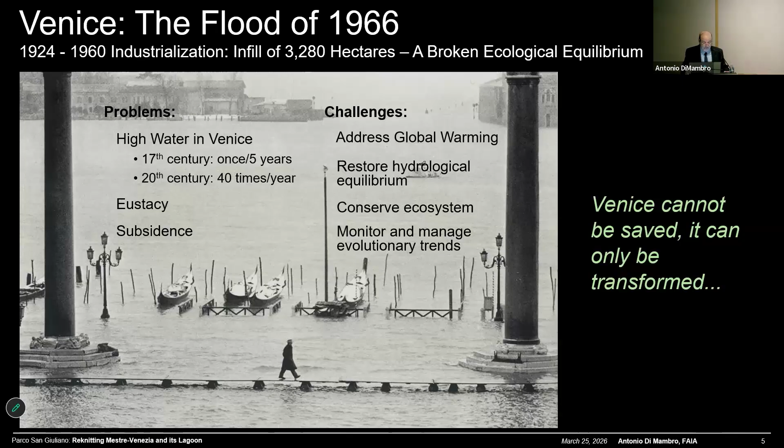They wanted to immediately save Venice. Venice cannot be saved, it can only be transformed. And the problems that unfolded at that time required a special set of laws that the Italian government decided to promulgate.

These laws led in 1984 to the creation of a new consortium, Venezia Nuova, which regulated the protection barrier that the city and other organizations decided to build in order to save the lagoon from the sea.

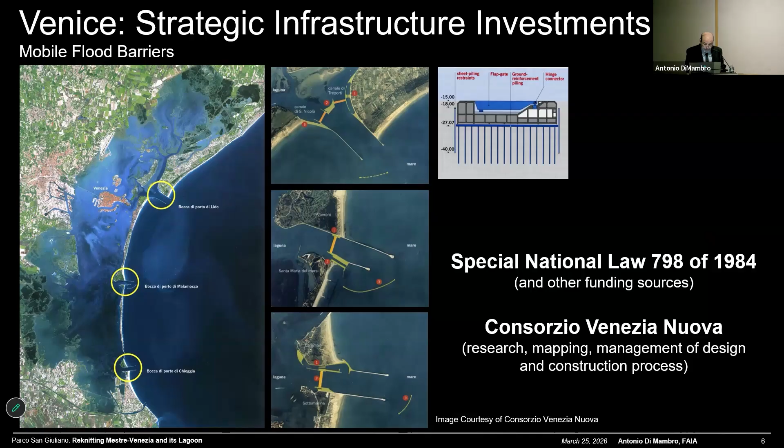Having given you the framework, I'd like to start my presentation of the project of the city with two heads, Mestre and Venice, a project conceived at the turn of the century between the 20th and 21st. I've organized this presentation in three parts, but it will be very dense. I wish I had three hours. I don't, so pardon my speed.

In the first part, I'll give you the understanding of the historical facts and conditions that led to the international competition. In the second part, I will illustrate the guiding planning documents and all the detailed project documentation we have prepared, and then give you a view of the completed part of the project.

And guide you through a tour of the park, which is an assemblage of images I have taken during my many visits. When I finish a project, I never abandon it. You, as a professional, need to be accountable to what you do and defend it if it's worth it.

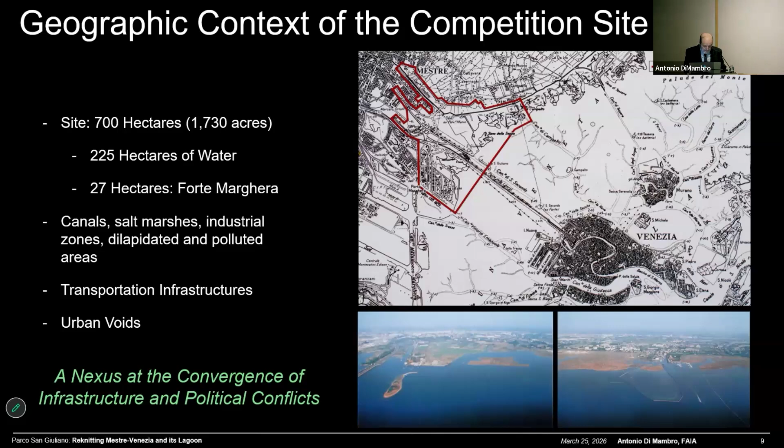The site was a very special one. It's where an umbilical cord was eventually, historically, attached to the island, and the island became connected with the main infrastructure that the country was building.

There were many improvements done in this area. You can see that in this area, there is a band of protective natural habitat called le barene in Italian. Canals were built to connect Mestre to the lagoon, before a grove of railroad and other infrastructure were used to cover this natural habitat.

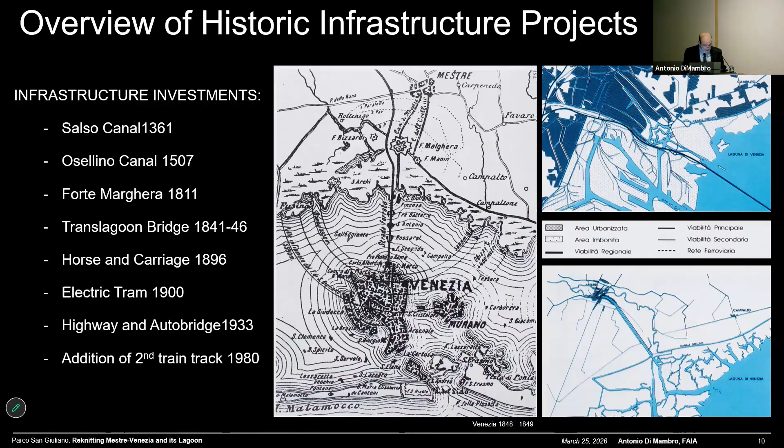The actions that changed the nature of that natural habitat are summarized in these three points. First, the incredible development of a very ill-conceived, I may add, a posteriori, industrial park, the most important industrial pole of northern Italy, right on the lagoon. That incredible futuristic park was conceived without considering the implication of what was being done to the environment.

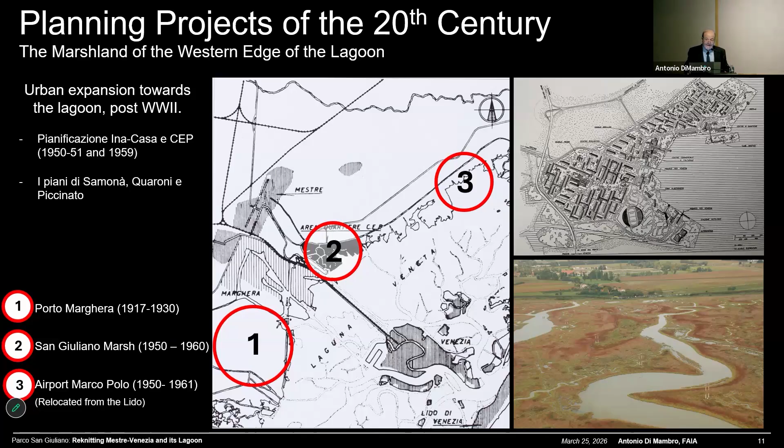But while this discussion was going on, the people that had proposed the greatest industrial pole of northern Italy were dumping toxic waste on the same place. And all of a sudden, we had an ecological disaster.

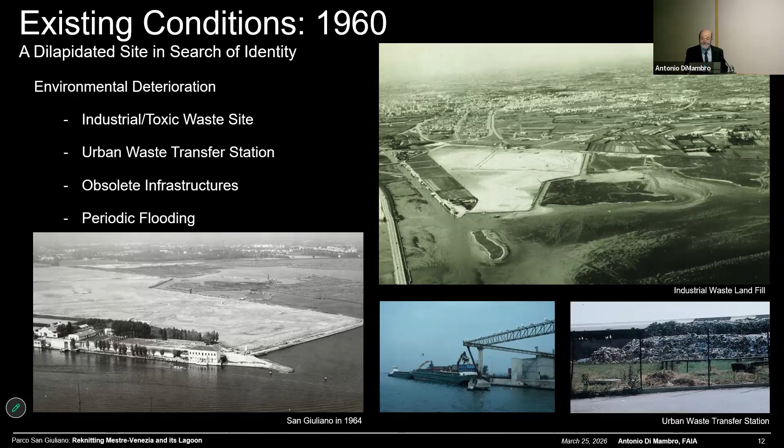The site was in search of identity, character, and function. It's a site that flooded big time, and toxic waste was deposited without protection on the Barene. To make things even worse, all the urban waste of Venice came to this point and was processed and shipped outside of the site. Meanwhile, the place that was so dear to the people of Mestre was this little park at the tip, which was their common ground.

Very quickly, let me show you the condition of all this area: dilapidated and in search of identity. There were heritage sites. There were incredible waterways and infrastructure that was in a state of decay. Constructions in the water had limited the flow of water, creating major problems.

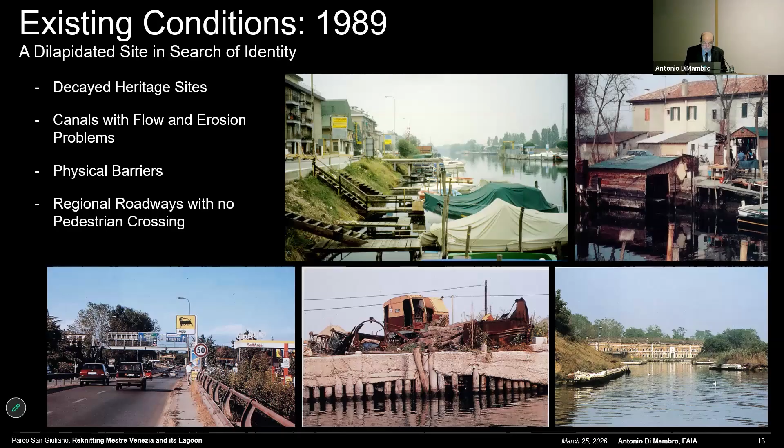So we entered the competition with a very clear choice that we had made. We saw three courses for the ecological evolution of the city, of the lagoon: the natural course, that with time would silt the entire lagoon; the conservation course of action, that controlled the lagoon environment; and the current course, where the sea would take over again.

The conservation course of action guided our work, and I believe it's the right choice here.

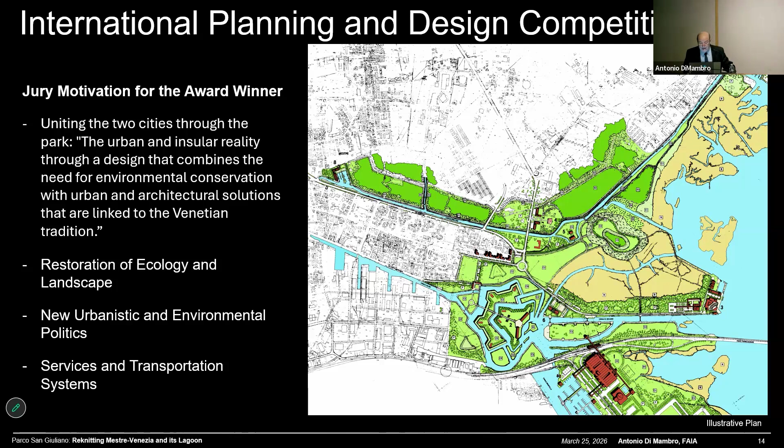We were awarded this, winning with a very simple motivation. They liked our proposal because it was based on the restoration of the ecology and the landscape. We had expressed very new ideas about environmental politics, and we believed that any restoration of the ecology there had to be done with services and transportation systems. The image speaks for itself.

After we won, the city were puzzled, as Margarita said, that an American team had won this. I began to have negotiations with the city leaders. They wanted me to do this project. I said, maybe.

I believe in interdisciplinarity and a holistic approach. I believe in participatory processes. And I have very strong views about the reclamation of the environment. We need to make sure that the city and its citizens understand this complexity. It was not an easy task, but they agreed with it, and we began our adventure.

The first thing that we produced was a series of diagrams that illustrate how the entire area would be reorganized, how the various parts, the kit of parts, would fit together in a new comprehensive view, and how the activities would be programmed inside each of these zones.

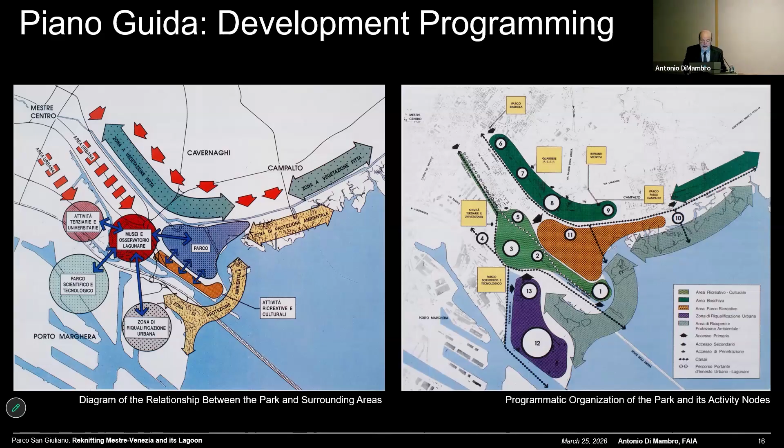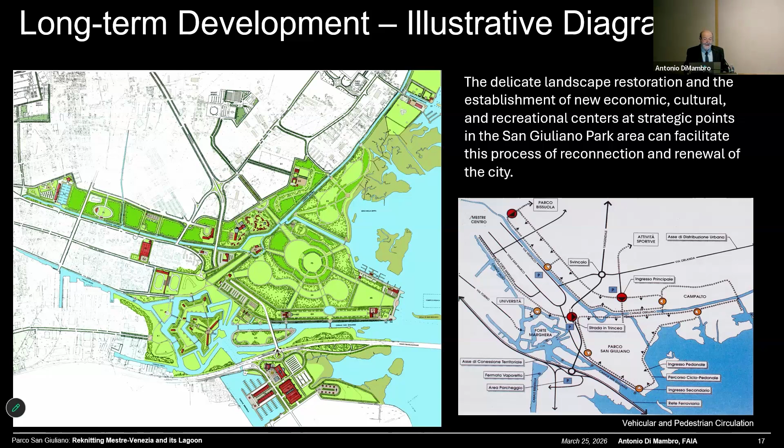The long-term development plan was refined because we had new information, and some of the things we were suggesting in the original proposal could not be achieved. We ended up with this plan, which is a delicate restoration of the landscape with the infusion of economic, cultural, and recreational centers at strategic points, based on a fine-tuned network of roadways, walkways, and canals.

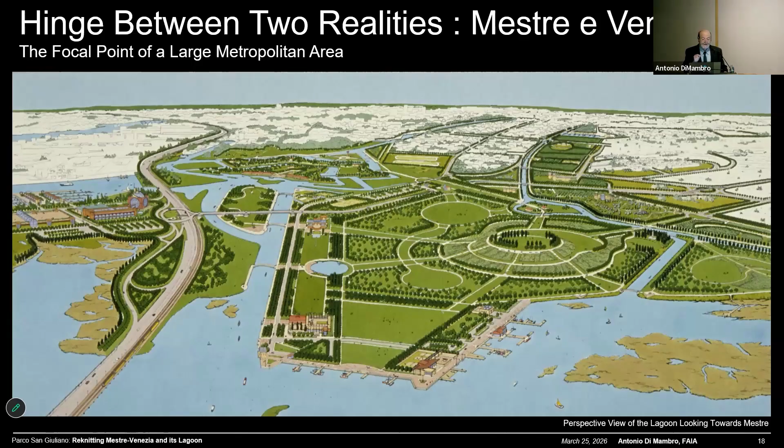The image we proposed was the hinge between the two realities of Mestre and Venice, a focal point of the large metropolitan area. The backbone of this was green infrastructure, supported by other infrastructure, made of very important pieces of the lagoon: woodland, recreational park, ecological gardens, urban green, natural habitat, and the stabilization of the entire water edge.

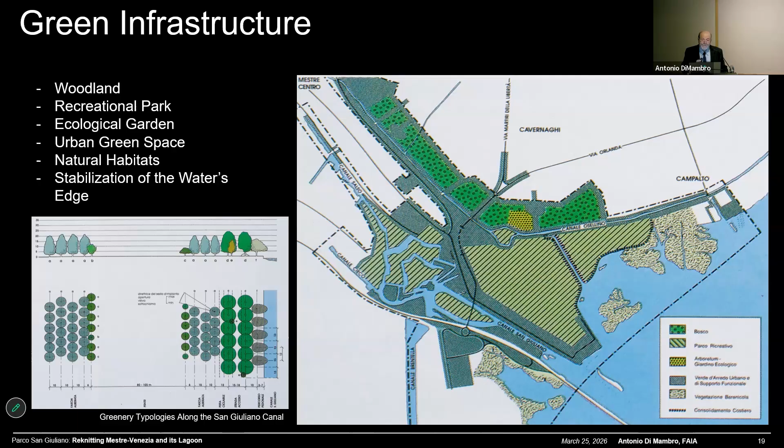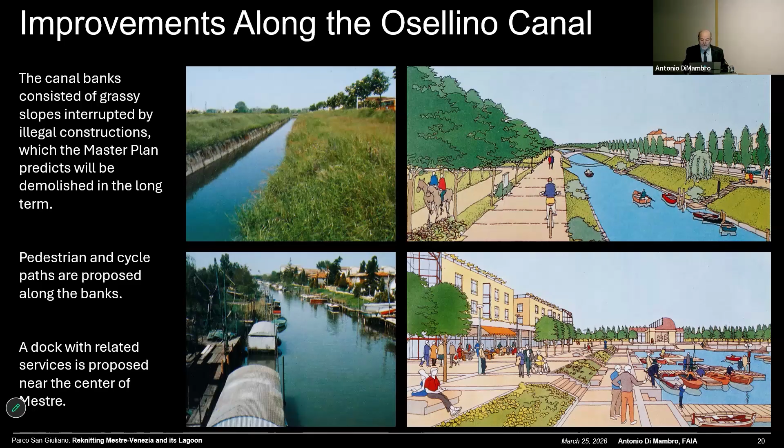The improvements we proposed for each of these areas were compelling. How many nights we spent discussing the look of these places, but you see the transformation. For example, along Canale Osellino, all these boats that were there prevented water from moving. We proposed to free that, and new edges were defined.

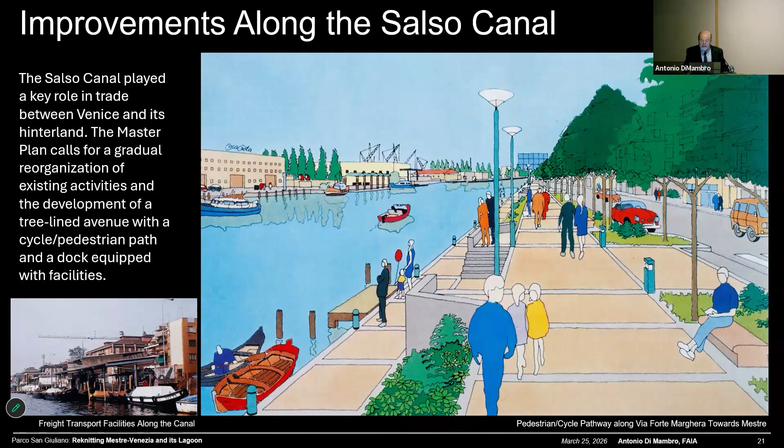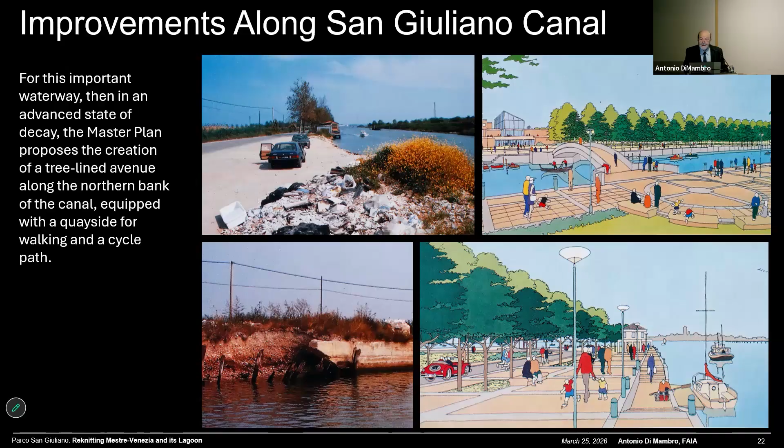Along Canale Salso, a two-side canal with economic activity on one side and pathways for strolling on the other. Along Canale San Giuliano, a dumping ground when I first arrived there, now a promenade, and that leads to a meeting place once again, which is Punta San Giuliano and its reorganization of all the activities.

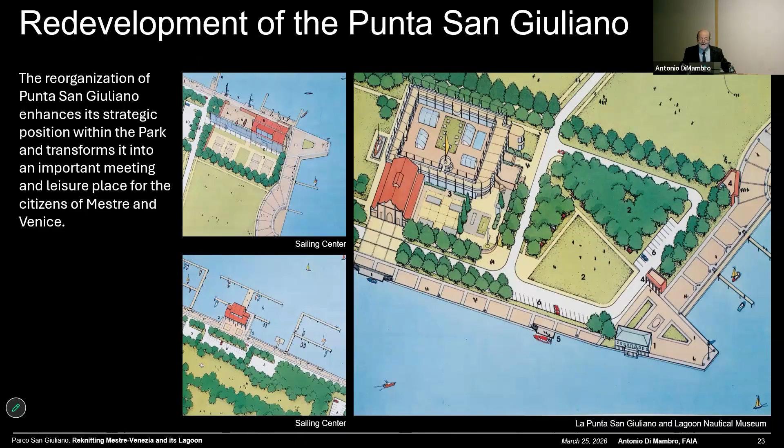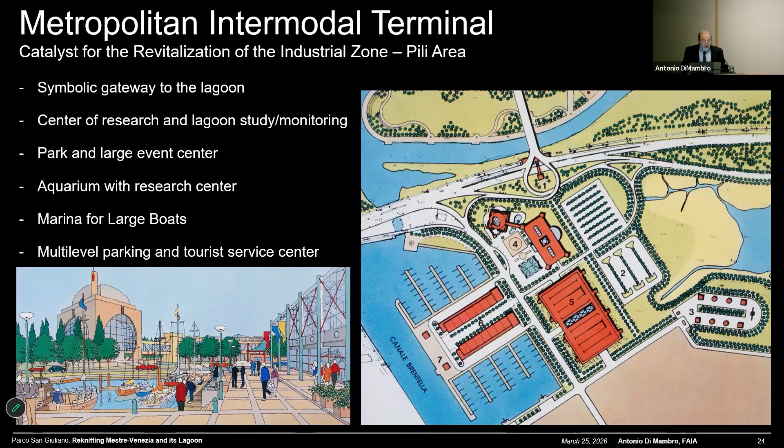And under this grove, a series of facilities for picnic, for community life, etc. But the most important thing we proposed was a metropolitan intermodal facility, a terminal that becomes the catalyst for the revitalization of the other nightmare on the other side. It becomes a symbolic gateway to the Lagoon, a research center, park, and other facilities for large gathering, multi-level parking and tourist services.

And the Lagoon Heritage Memorial, which we planned inside the fortress and the exhibition areas. We finished our work and produced 36 panels, which I shipped, and the city decided to have an exhibition.

I couldn't attend that day. The fate and my body was beginning to tell me that I was traveling too much. But I sent a few messages in the form of short essays that were printed by the three major papers.

And I said to them, to redesign the city, it is possible. We have accepted your challenge. Now you need to win the battle. In the image on the left, you see Mayor Cacciari, Pro-Mayor Zorzetto, and other leaders. They were there in front of all the documentation, and they had to answer questions from the journalists.

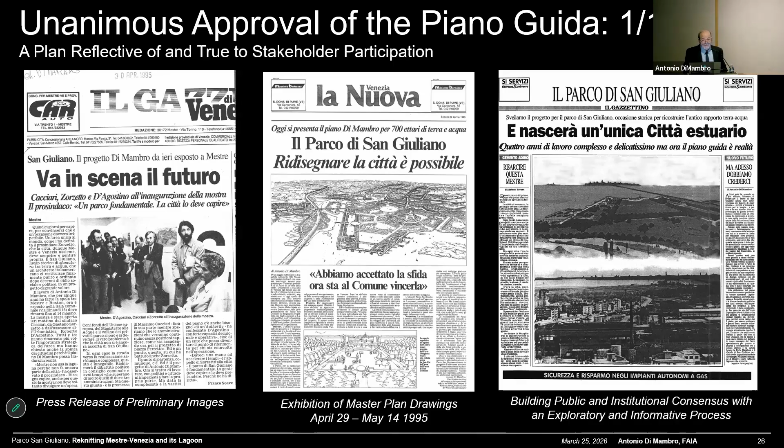The agreement we negotiated was very complicated, but it was extremely important. The park as a key link connecting Venice and Mestre—it had to be bottom-up, not top-down. Our challenge was to demonstrate the establishment of the natural habitat as a priority and a possibility, and providing ideas for site remediation was very, very complex.

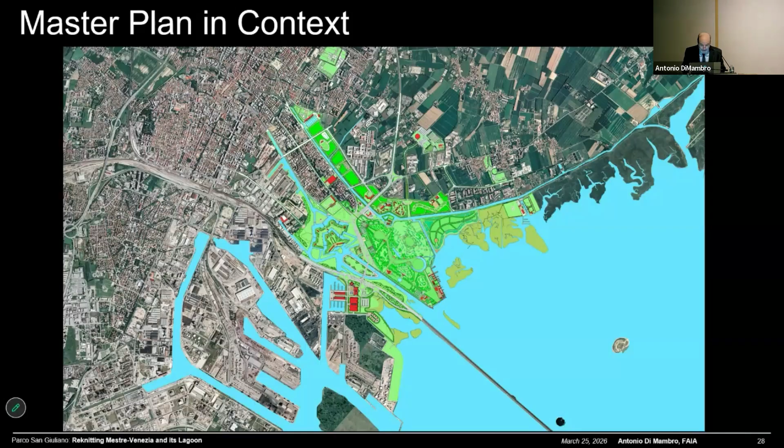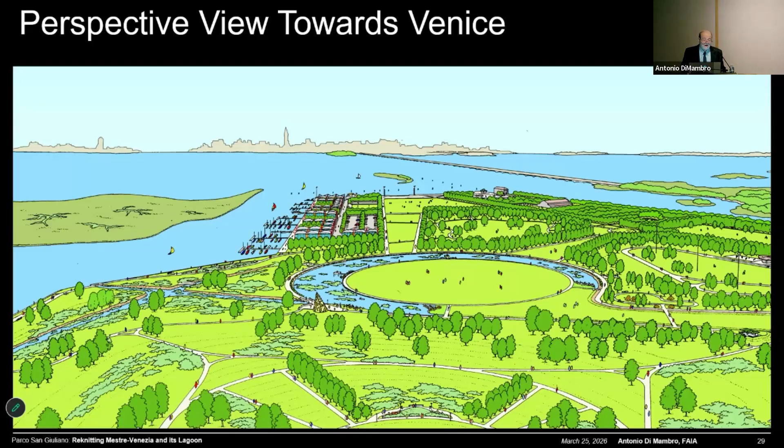After 4 years of hard work, this is the final plan that was produced. The ideas embedded in the beginning are still here, but they are refined and much richer. So we reopened the view of Venice, which had been forgotten. We looked back with pride to the ugly city that needed to be fixed and become La Bella Mestre.

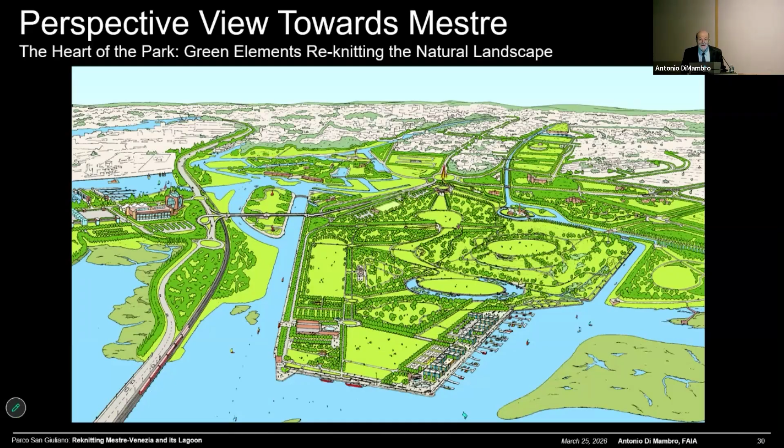The complexity of the final design and the implementation challenges were almost insurmountable. I had to learn a lot about the procurement and bidding process, the project phasing, the stakeholder coordination—the list of stakeholders was long, you have no idea. And they all had power, and they didn't talk to each other. I came from Boston every month, every week, every 2 days to make sure that they would dialogue. And only through dialogue do you achieve change.

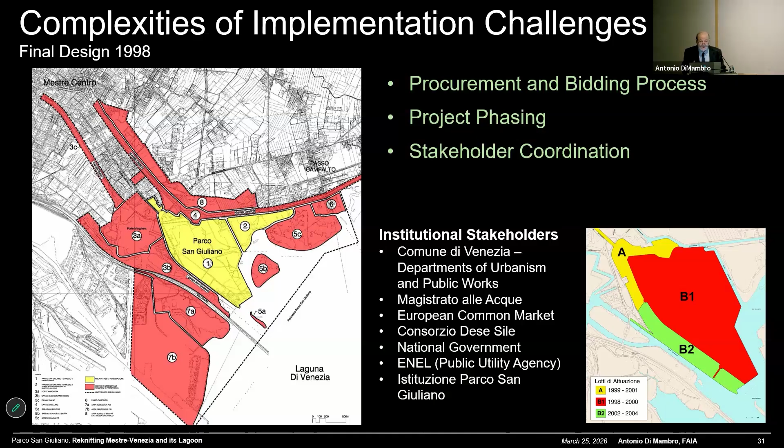And the final design, which was further refined, was based on a very simple reorganization. The final design that the city entrusted my firm was the heart of the park, and other organizations would be entrusted with the other contiguous pieces. But in designing the heart, the main idea was a promenade that would take you from the center city until you, as a pedestrian, meet again the edge of the lagoon.

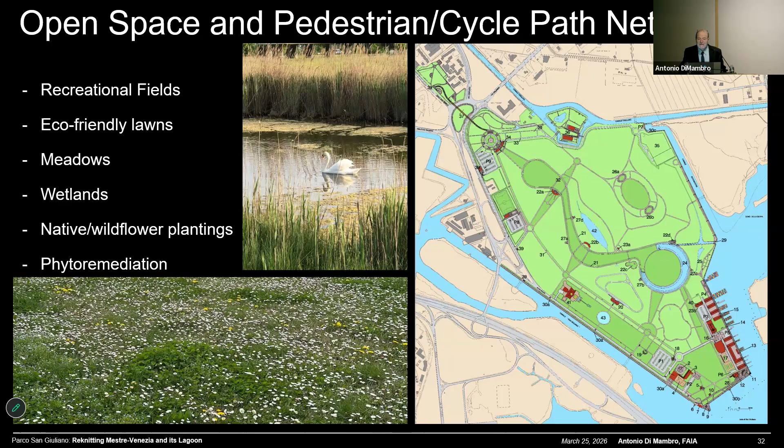These recreational fields filled with eco-friendly lawns, these meadows, these wetlands that we had added in the final design, with native planting, a wildflower planting, were selected to help nature in the process of phytoremediation. That was our answer to purify the dirt and to make sure the place was usable and enjoyable.

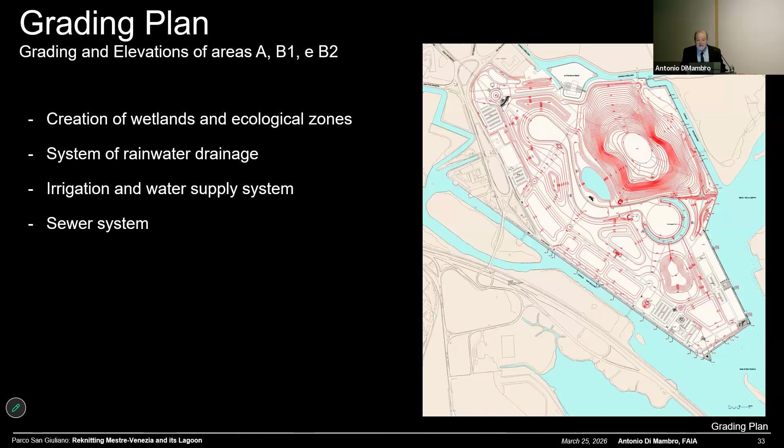The grading was a very complex operation because we wanted to make sure that the drainage of the site would be successful, and the planting was a joy to choose and to care for. But we had to take care of the remediation. The first priority was how do you deal with the toxic waste? It was the most difficult piece of the work.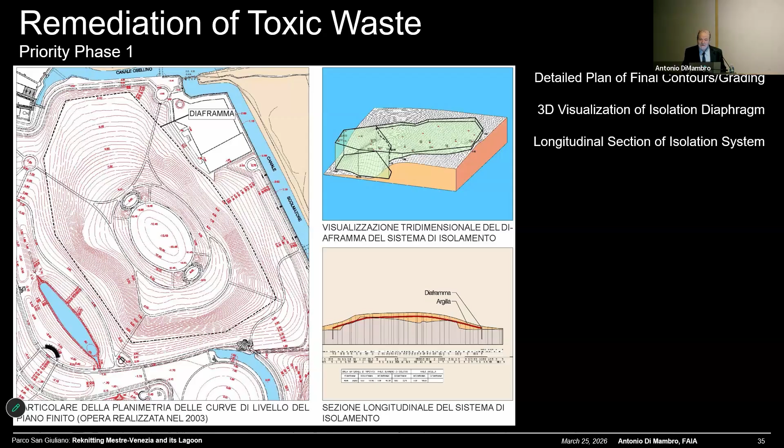And we ended up doing a piece of architecture that nobody will ever see. It's a sarcophagus that is 1,500 meters long and goes underground for 15 meters to meet a solid clay. I am not going to talk about it. It took us 3 years to arrive at this solution. And here are the phases of the construction.

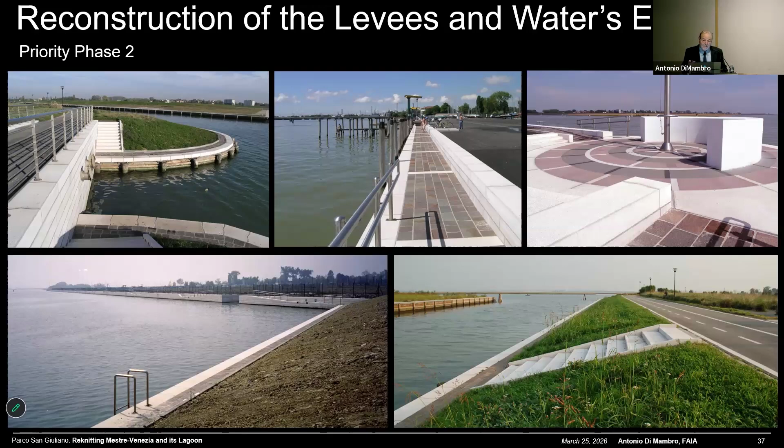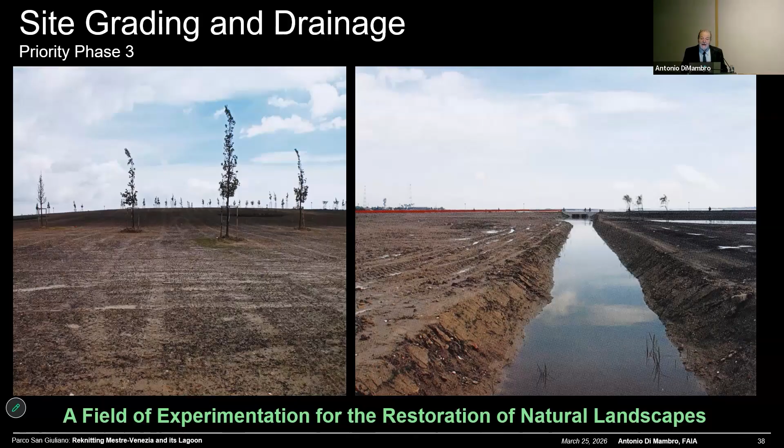And then we had to protect the edge of the place with a new edge that recalls the Venetian architecture of the island. The field of experimentation for the restoration of the natural landscape was the most complex thing that my dearest colleagues and I, that incredible team of experts assembled, worked night and day on.

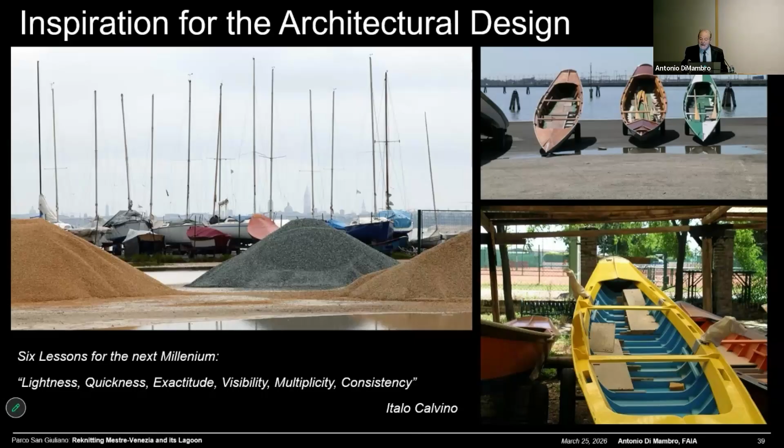We were granted by the city also the opportunity to do some architectural design. But I was not interested here in the architectural design of Vitruvius's incredible laws and ideas. I left that in Venice. For this site, my inspiration was the locals, the place, the element of the place, these vertical lines, the form of these boats, and what I had on my back, the incredible place where the new technology of Italy became an example for the world.

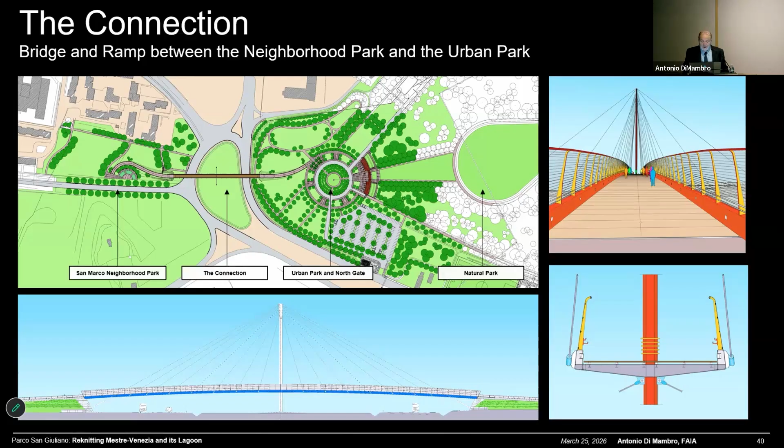The most complicated thing was the connection. How do you connect this place to the city? A thousand examples, but in the end it became a very simple sequence that included a neighborhood park, a bridge, a pedestrian bridge, an urban park, and the natural park. That was the beginning of the walk.

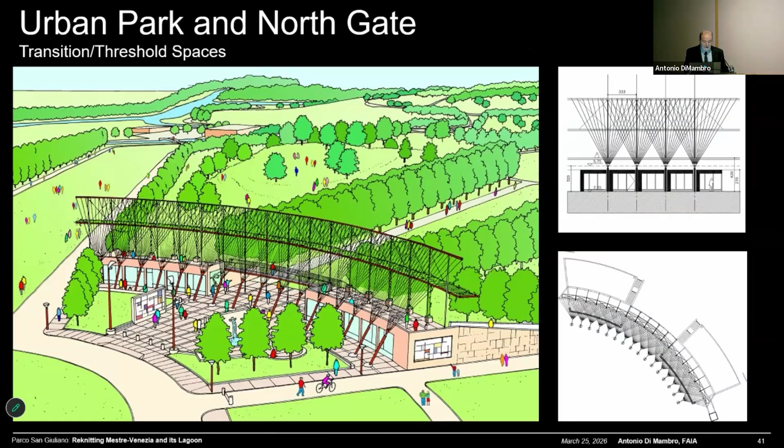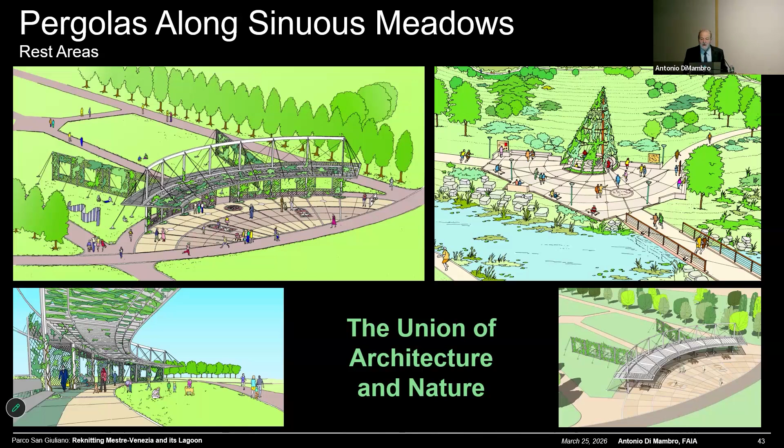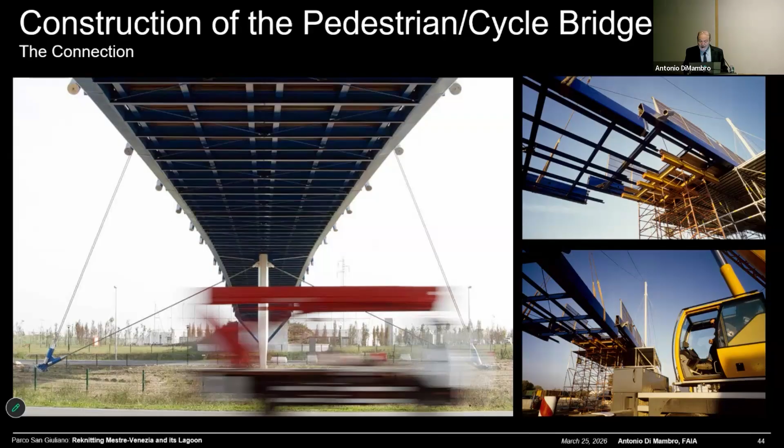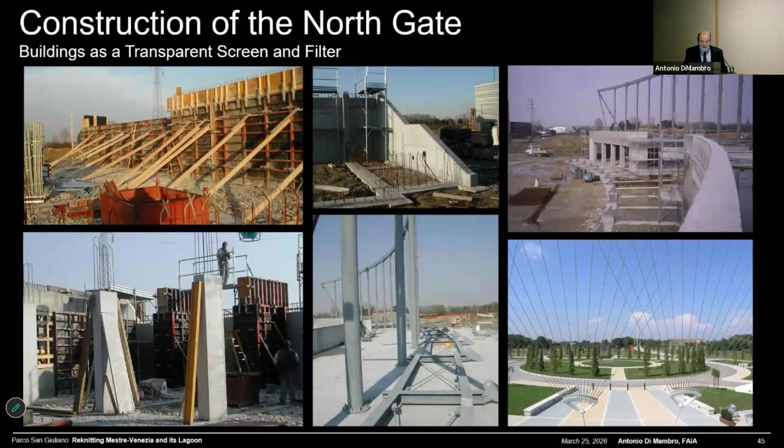So let me show you examples of the new architecture that we were trying here. We wanted to unify nature and built form. The construction, the bridge — and there is under the bridge a six-way rotary that is very complicated and was kept open during the construction. The construction of the North Gateway, a building conceived as a transparent screen and a filter, and the skating rink, which is another gateway that recalls the big forms of the nautical area and the genius of the technology that lies behind me.

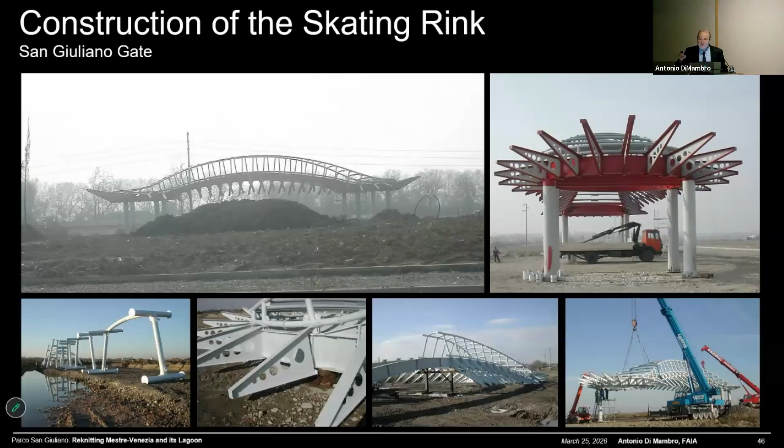The people couldn't wait to see this place, and now I'll go fast. They demanded an early opening, which Mayor Costa granted against my advice, but we did it, and they came, and they discovered why the plan looks like it is.

From the top of the bridge, there was this screen that framed the view, the majestic view of Venice, and each open window frames one of the iconic campanili of the old city. And the skating rink could become a stage for concerts.

Many forces wanted more, and they wanted incredible, disruptive events — I may add — the Heineken festival and the YouTube festival that they used to do in San Marco were brought here, etc., etc. But the place became a showcase also for cultural events.

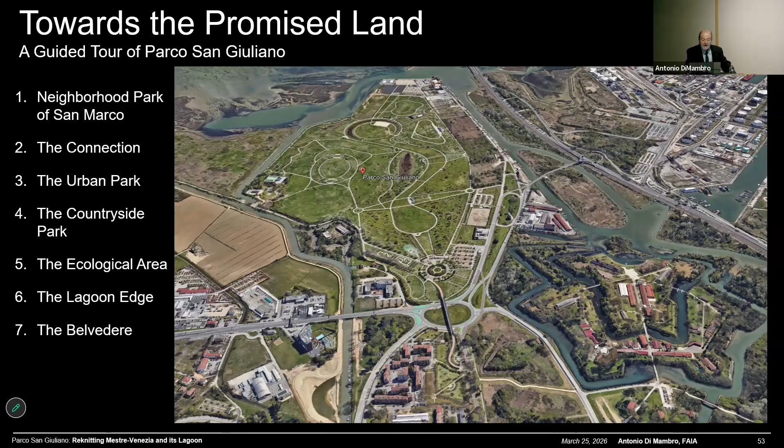So I promised you, and I will give you now, a guided tour of the Parco that has been realized up to today. You can see the sequence that I have chosen starts from the neighborhood San Marco. It goes through the connection, the urban park, and then meandering through until we get to the lagoon and the ecological area. So let's walk through this place. I will get a sip of water while you see it.

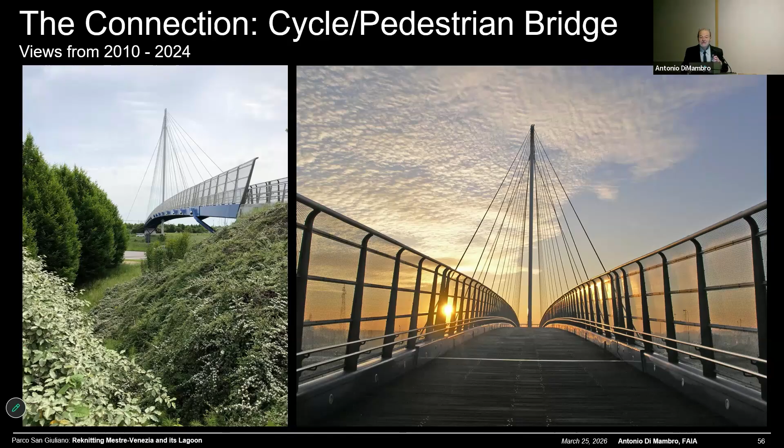The bridge goes out of the green. The deck of the bridge is in wood.

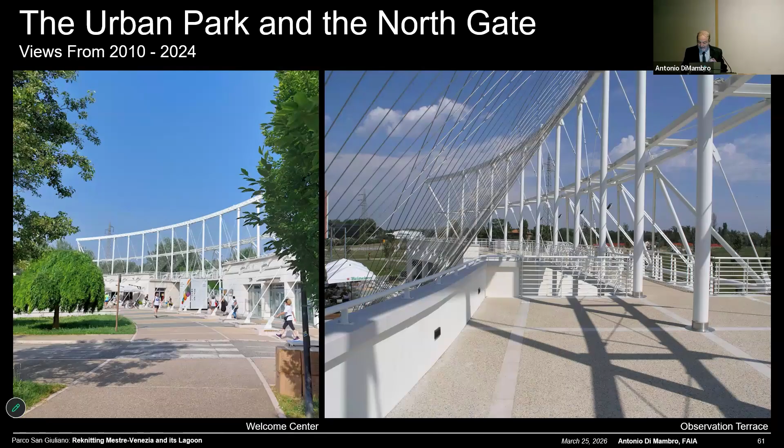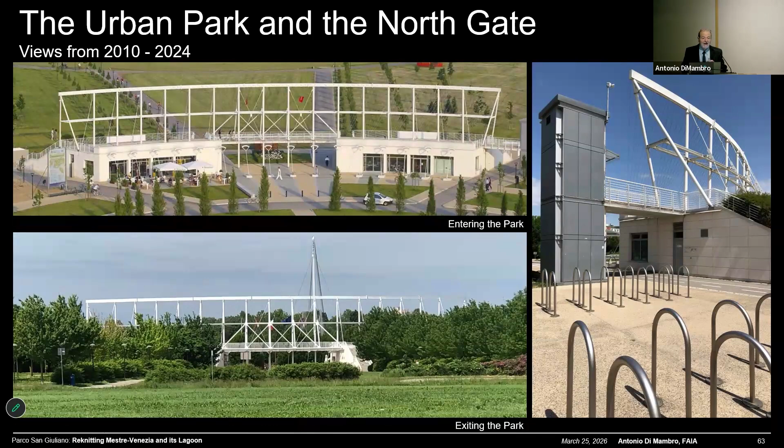Gateway doesn't have a face, doesn't have a gate, and nature takes over. This gate is a sculptured building that, like a large transparent screen, forms a diaphanous partition between the city building and the greenery of the lagoon. From that point, we move into the parkland and see the grassy knoll, the tree-lined pathways, the meadow, the ecological garden, and how people use this incredible place.

And the vegetation that nobody believed we could achieve, it's there, even without the proper maintenance. And Fred, don't forget, we planted 4 mulberry trees. They ripen 2 weeks before the one that you planted in your backyard. But they are tasty, and you are welcome to come and visit.

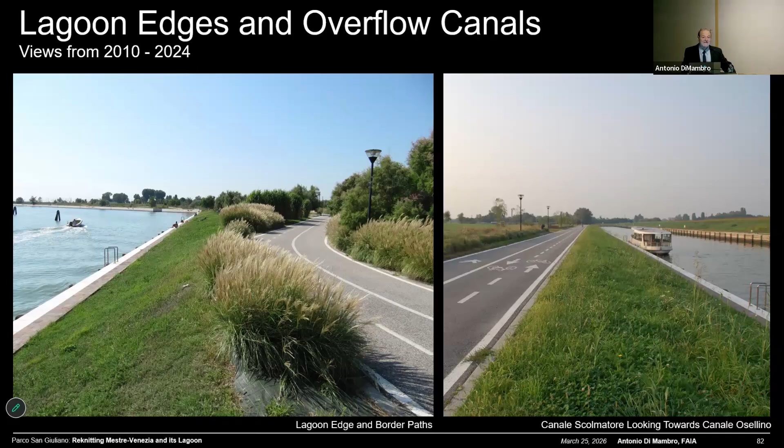And this is the beginning of the Garden of the Lagoon, that magical place, and you see the architecture disappears. And the entire redesign of the edge of the water. But the most important thing: on top of the remediated toxic waste site, we designed an ellipse with two observation platforms, one facing Venice, the other facing Mestre.

I'm standing here from the platform of Venice, looking at the silhouette of the historic center of Venice, that has been recaptured for the enjoyment of the people. And from that place, you can see the entire new, renewed landscape of the lagoon. You see the multiplicity of uses and the building and the recollection that this building gives us, the remembrance of the form of the place and the new technology that makes it happen.

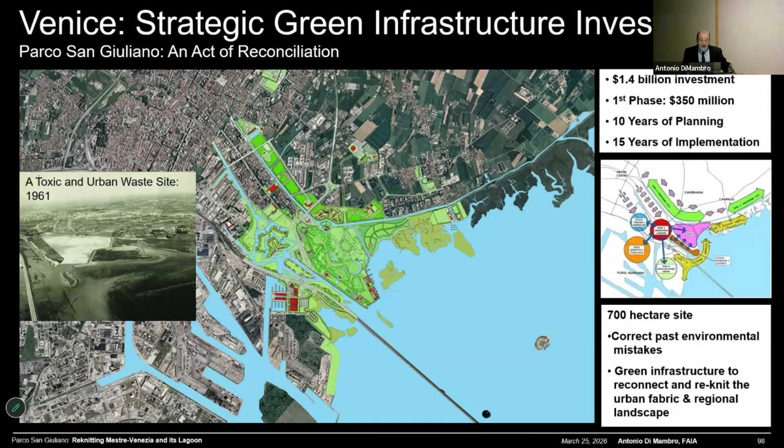Venice, we gave it this strategic green infrastructure investment as an act of reconciliation, a $1.4 billion investment. The first phase, 350 million, to reconnect, unify the environment in this moment of rethinking, of confusion. The city is trying to reposition itself in the global economy, even though the city had accepted and promulgated a series of ideas: the idea of a continuous belt of marshland and the reorganization of all the infrastructure of the space in between various parts.

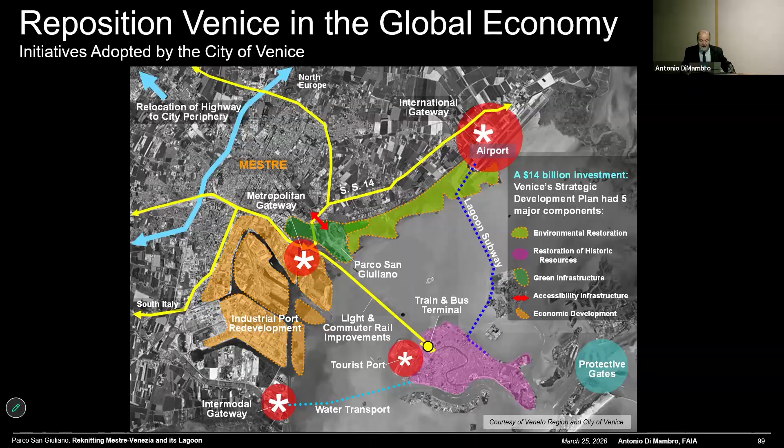The reality is that forces and counter-forces are still at work. Parco San Giuliano is an unfinished project. San Giuliano - a cultural treasure that requires continuous protection. When David Dillon reviewed this project in 1997, he said of the city that Parco San Giuliano was the most courageous act that Venice completed in that century, catalyzing the transformation of transportation services, landscape, and cultural life of the region.

I ask my fellow Venetians, the heirs of the Serenissima: what courageous act will you so choose for this century?

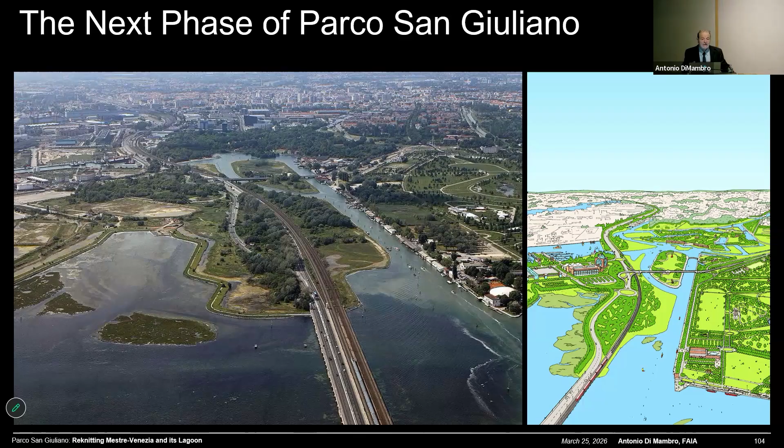Next phase of the project - in my mind, it's very clear, but the reality of the place is overwhelming. You see what we have achieved, you see next to it the next phase. This incredible reality must be reconciled.

Venice cannot exist without its lagoon. It's becoming an endangered species. And thinking about the future, let us remember all the emerging themes and the new conflicts that have been left unresolved and need to be dealt with, through confrontation or dialogue.